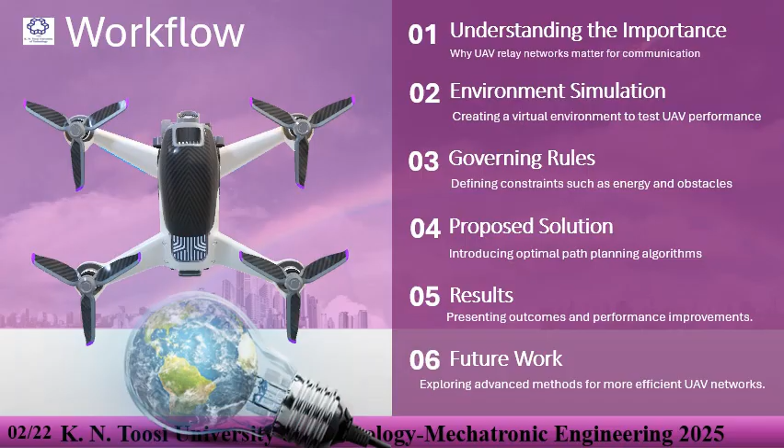Let's have a quick look at the workflow. First, we understand the importance of the topic. Then we go through a simulation environment to see how it works. Let's use a simple story to better understand the importance of this topic. A short story about a person named Bob.

First event, an ordinary busy day, just like always. But suddenly everything changes and an earthquake happens. Natural disasters are not planned and they can happen anytime. An earthquake can cause serious damage to everything. Bob is also badly hurt and needs help.

The only idea Bob has is to send a signal. But in these cases, all communication lines get damaged. But Bob needs important things, most importantly, information. So for now, we leave Bob alone to think about how he can solve his problems.

The second event, Bob and his friends are making plans for the concert. So Bob goes to a concert and starts having fun. But there is a problem. He had planned to meet his friends. So he takes his phone to call his friend. But the phone signal is weak and cannot do this job.

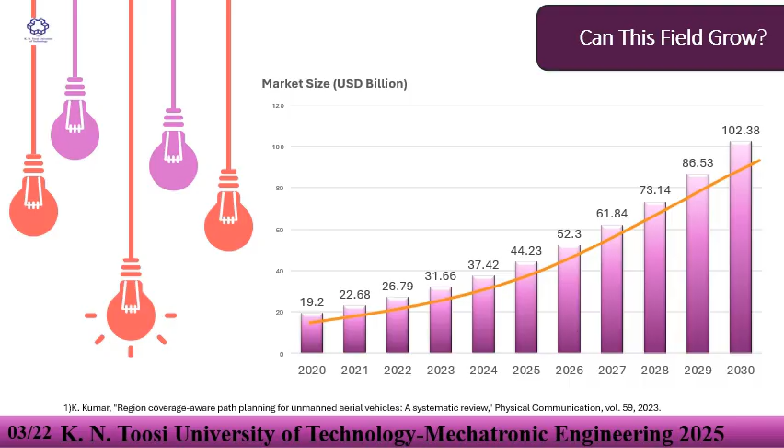Will the topic of UAV coverage be discussed more in the future? In one paper I read, this topic was predicted. This paper said the discussion will become more and more popular in the future. This is very good and gives us hope.

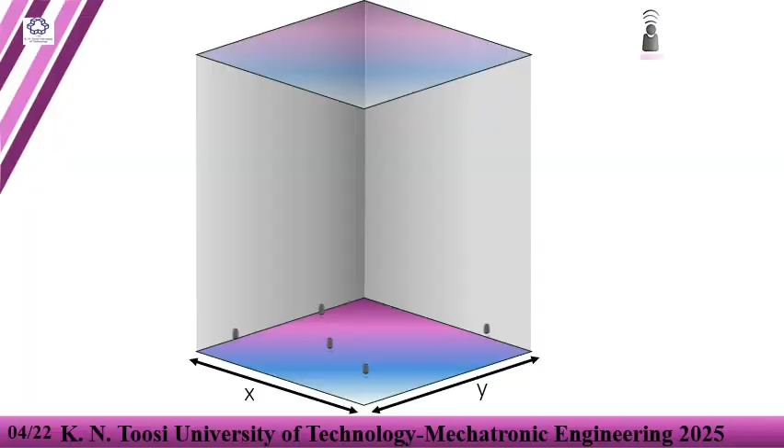Now let's design a simple simulation model for this topic. First of all, we need a three-dimensional space. Next, we need some users in the environment. And in urban space, there are tall buildings that act as obstacles. Apart from buildings, there are also no-fly zones such as a high-voltage power station or natural obstacles like a mountain.

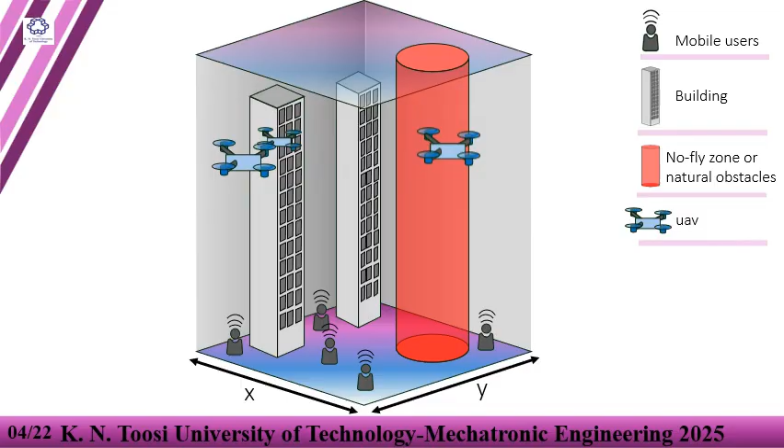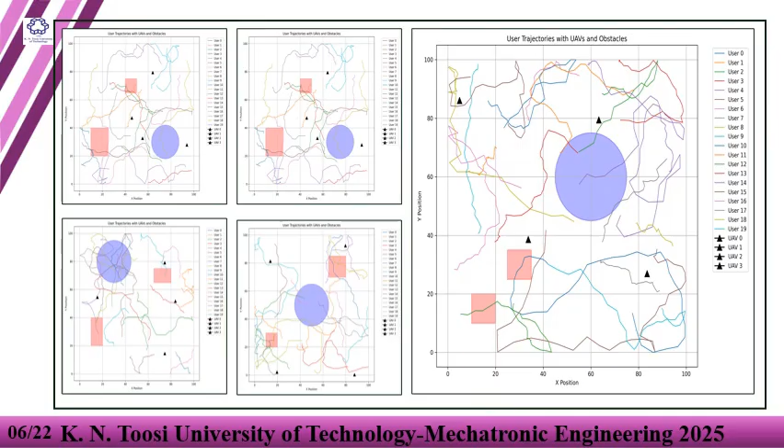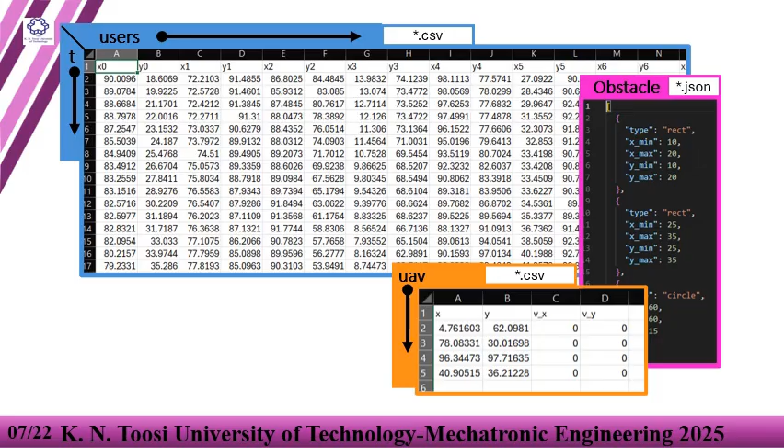And of course, we also need some UAVs. Assume that the UAVs fly at a fixed height, so we need to consider one flight plane for them. Therefore, we can simplify the model and consider the environment as two-dimensional. For better comparison, we designed 5 modes. We save the position of the 20 users over 20 time steps, the position of the obstacles, and the initial information of the 4 UAVs for each mode.

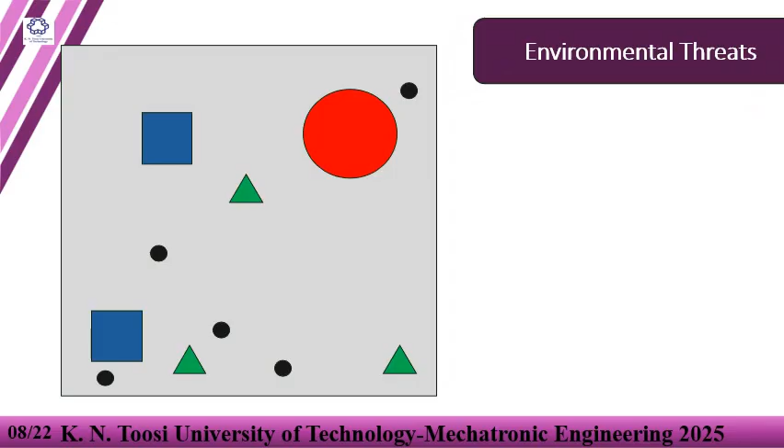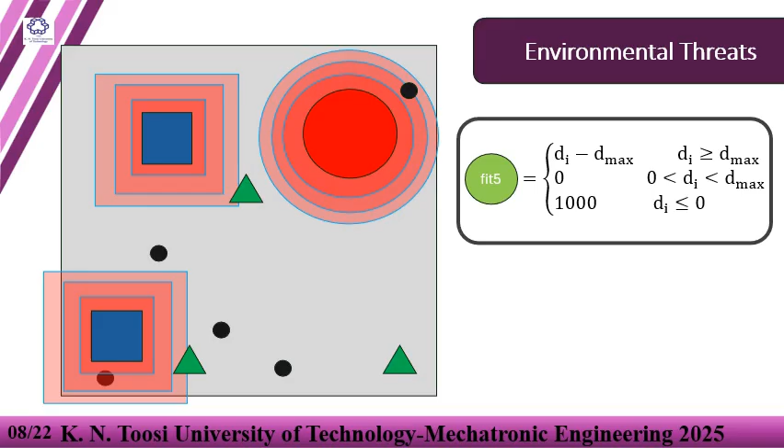And for the path calculation, we have a set of rules. There are some obstacles on the map that the UAVs must avoid. We call these rules fit 5. According to the equations, if a UAV gets closer than the safe distance, a penalty is given, and if it collides, a heavy cost will be applied. We also need to define some rules for the movement of the UAVs themselves.

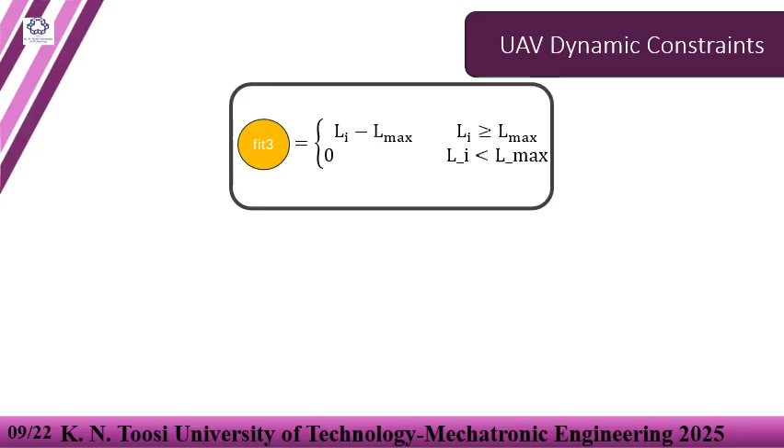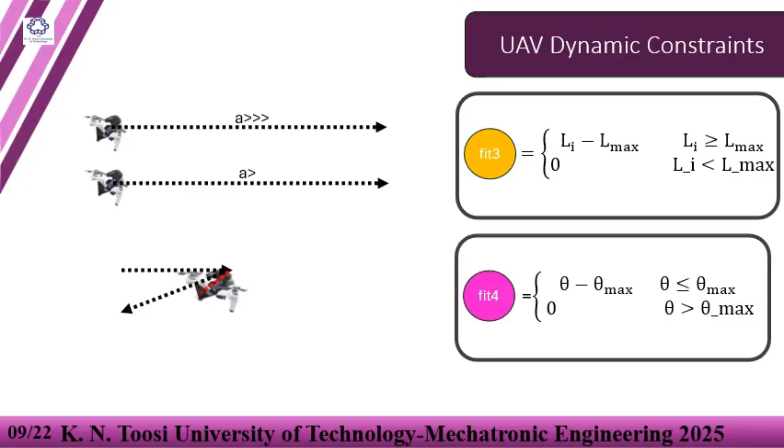For fit 3, at each time step, a UAV can move only up to the limit distance. We also set the rule fit 4 for the turning angle, because too much rotation can cause deviation and loss of control. Now let's add a few rules to keep the signal strong and stable.

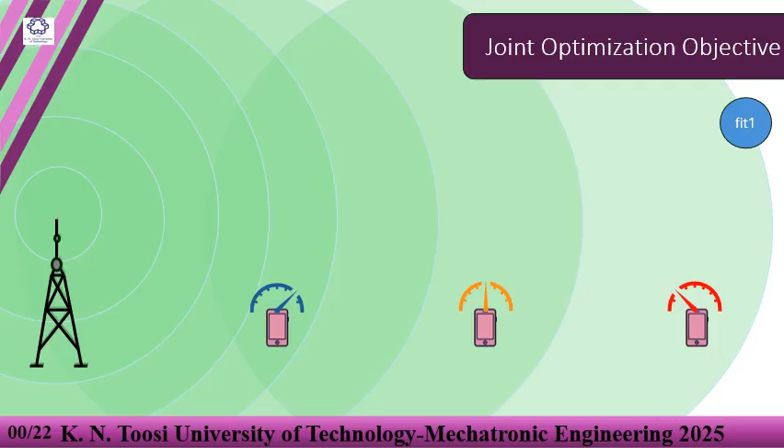Fit 1 follows the idea that the farther a user is from the signal source, the lower the communication quality becomes. Another important issue is the distance of obstacles, which create noise and reduce efficient communication. Obstacles such as a building can strongly affect the signal.

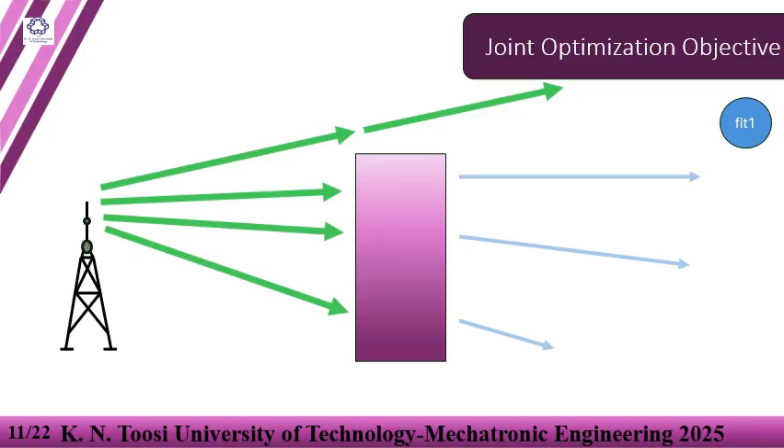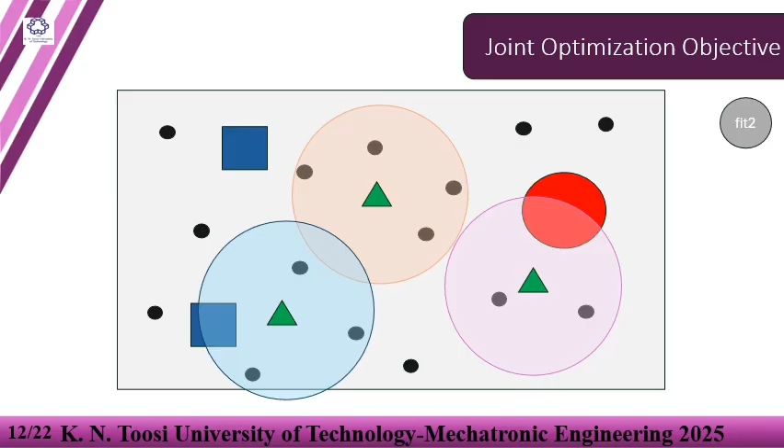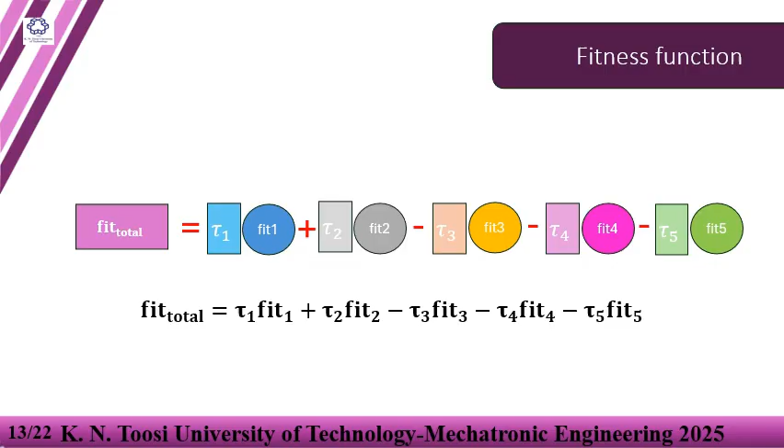Another important point in communication is the number of users that receive at least the minimum quality. And finally, the selection of the best communication position is consistent with the fit total function. Each rule has its own importance. We use a set of weights to show the priority of the rules.